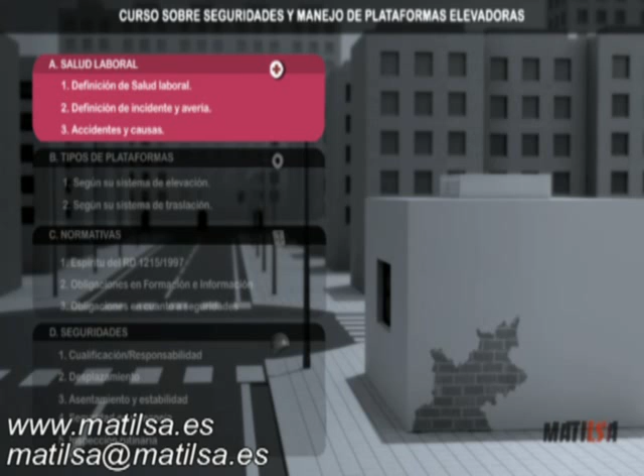Part B, Types of Platforms. We will review the different types of platforms that are on the market, separating them according to their different systems of raising and transporting, and what their most common applications are.

Part C, Regulations. It is important to know the current regulations regarding training and safety, and how these are transferred to the platforms in respect of their different safety mechanisms.

Part D, Safety. Oriented to the practical aspects in the handling of platforms and the basic safety procedures while working with this type of machine.

We hope that this course makes a contribution to decreasing as much as possible accidents due to both lack of knowledge of the working tool itself and good safety practices.

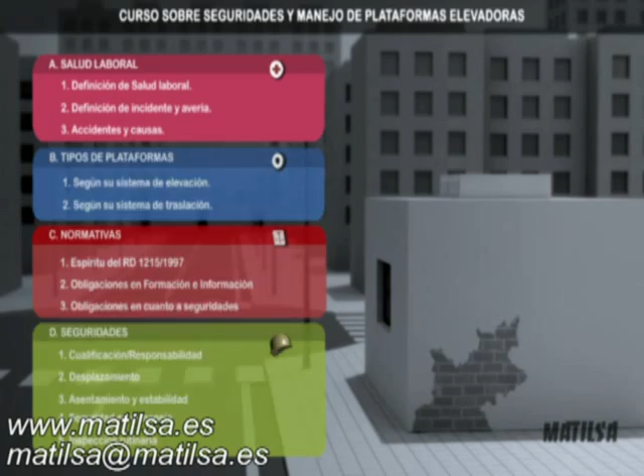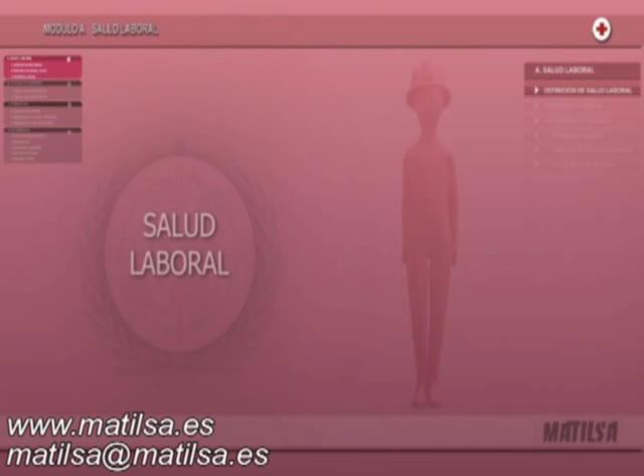Concepts of working health. According to the World Health Organization, working health is the field that ensures that the worker who works for other people maintains the correct levels of physical, mental and social health in his or her workplace.

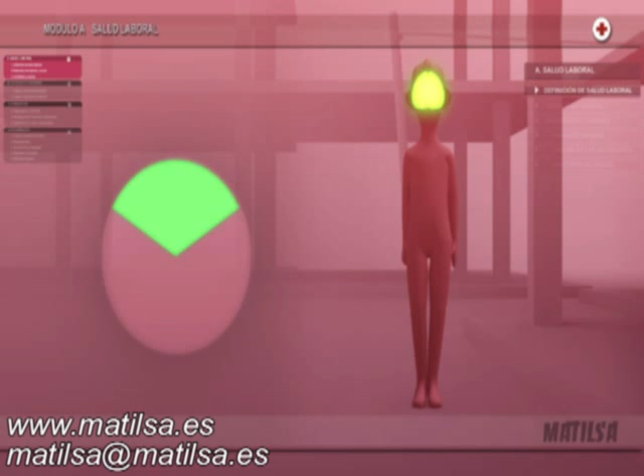Physical or organic health that a person has as a result of the correct function of his or her cells, organs and biological systems. Mental health, which assumes an intellectual and emotional balance. The social health or welfare of the person in his or her social relations.

An incident is defined as every single abnormal event, not desired or wished for, that comes about in a sudden and unexpected manner, breaking the normal work activity. When we talk about incident, this always refers to people, although incidents do not cause harm to health.

Breakdown is defined as every single incident that affects the good function of a machine or work tool. When we talk about breakdowns, we are always referring to machines.

Accident is defined as bodily injury in which the worker suffers as a result of the work that he or she carries out for somebody else.

If the accident is an event with physical damage, the incident, on the contrary, is an event that has not caused harm to the person, but could have done so if the conditions had been different.

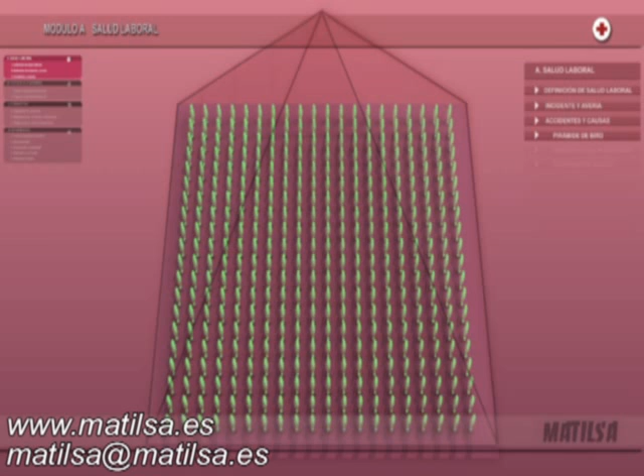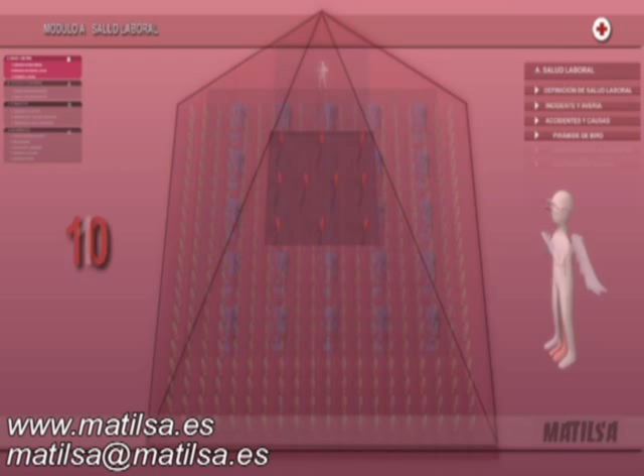Bird, who was an expert statistician, discovered that for every 600 occasions in which incidents without injury happen and are not reported to the company, 30 incidents or breakdowns are produced with material damages, 10 with accidents that cause minor injuries, and 1 accident that causes serious injury.

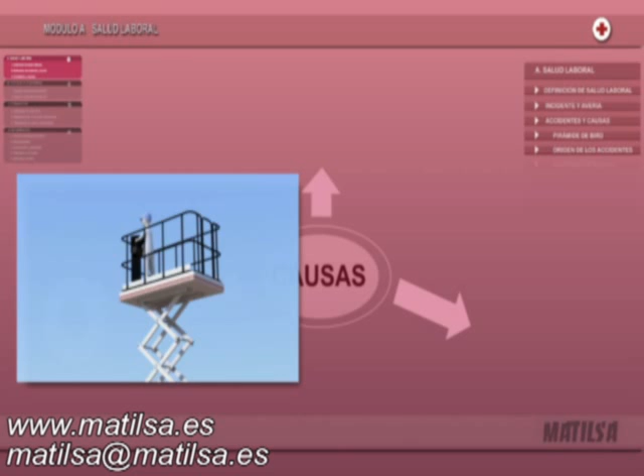The origin of accidents. Accidents can be classified according to their causes thus. Technical causes: these are failures of machines and equipment together with events caused by operations which have been badly designed from the aspect of safety, etc. These causes are relatively easy to know and to control. The location of the failure is detected and a technical measure is applied to correct or reduce it.

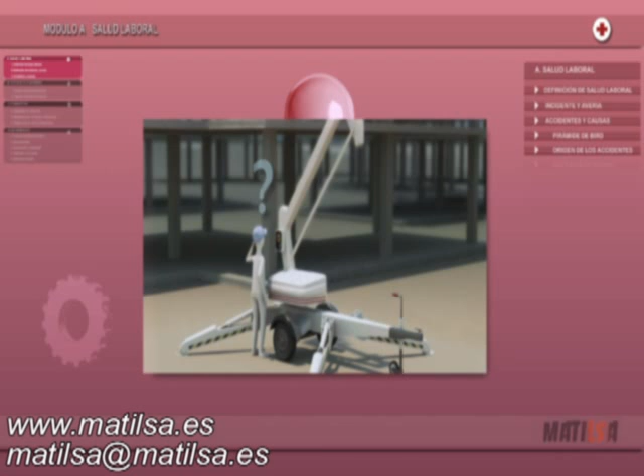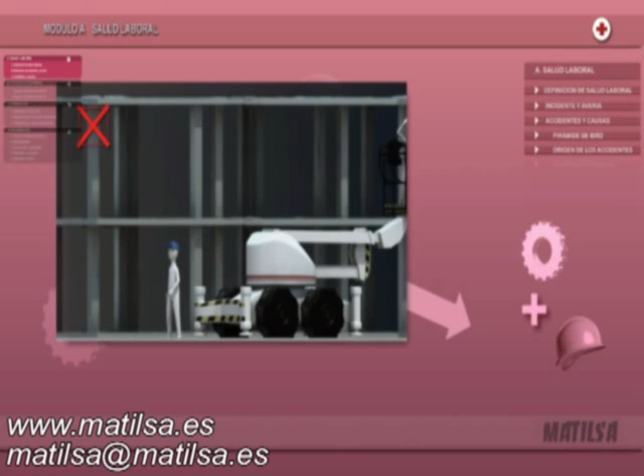Human causes: these are acts in which the workers, due to their lack of information, training, attention or interest, produce directly damaging effects. Human and technical causes are simply a combination of the two aforementioned causes, that is to say, the existence of a technical failure plus an act of lack of attention, or the technical failure linked to the lack of knowledge of the worker.

Risk factors. Some risk factors also exist that can cause a greater number of accidents. These factors can be classified according to their origin. Material factors, such as tools in bad condition, breakdowns, etc.

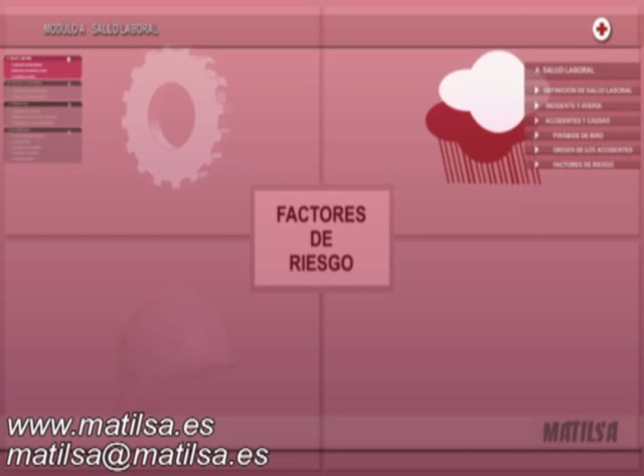Environmental factors, caused by the conditions of the working surroundings, weather conditions, ground conditions, etc. Human factors, caused by human error due to lack of information, bad working health, etc.

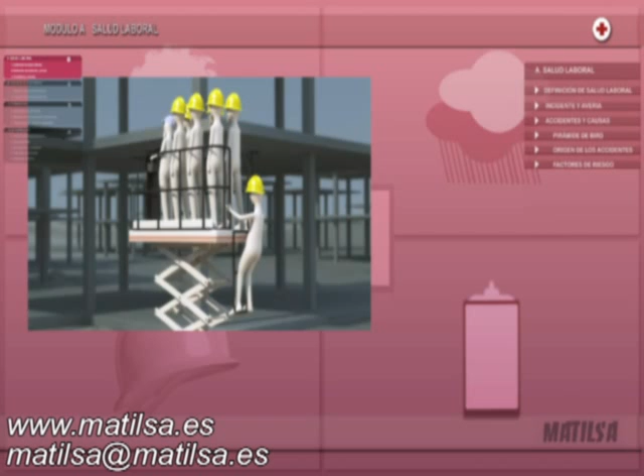Organizational factors, caused by organizational mistakes, that is to say, by work being badly organized, personnel badly located, plans badly made, or bad assignment of delivery times.

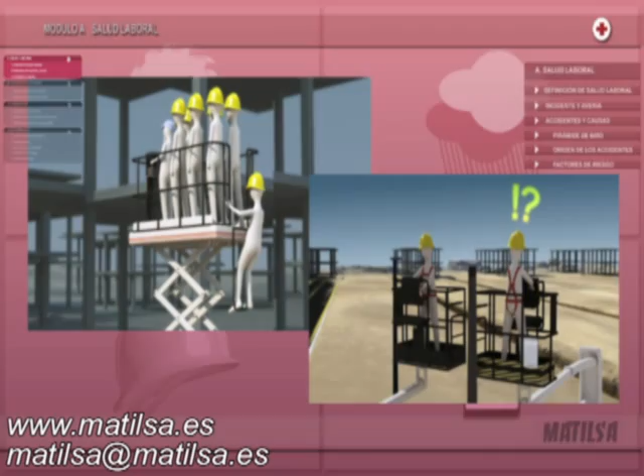Types of access platforms. The access platforms can be classified by their system of elevating: articulated type, telescopic type, and scissors type.

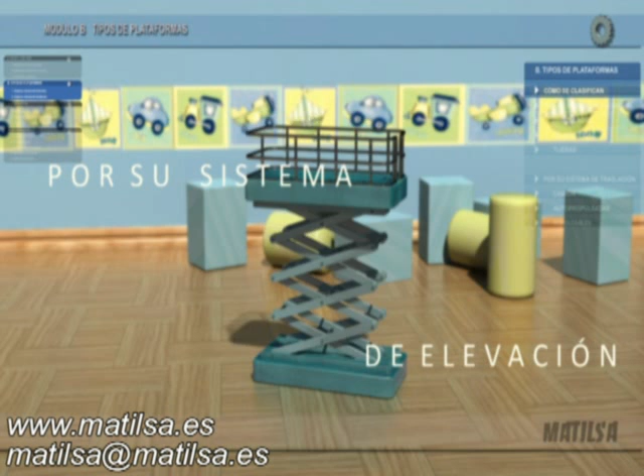They can also be classified by their system of transportation: truck mounted, self-propelled, or trailer mounted.

We can combine the different systems of elevating and transportation to satisfy all working needs. It is also frequent in the articulated and telescopic types to combine both systems in order to obtain greater versatility, as we will see later.

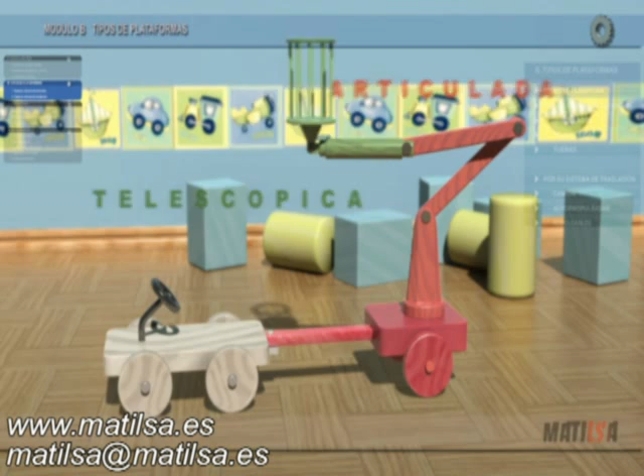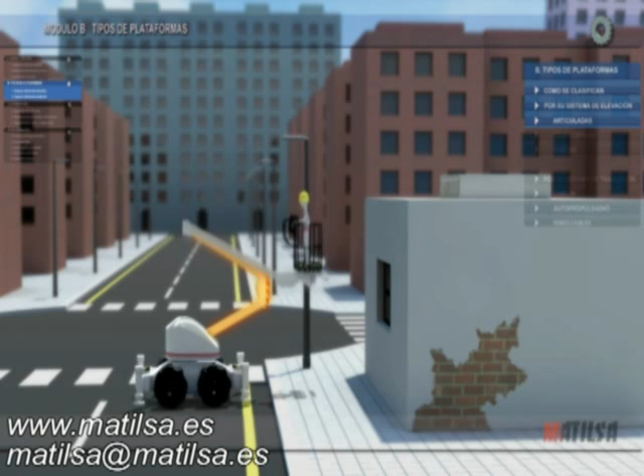Features of the different elevating systems. Articulated platforms. Articulated comes from the concept of articulation. An articulation is composed of two arms. In addition, there are a large number of machines that have an arm within another one.

These are known as telescopic systems. These are used where there is a higher lateral transportation to be carried out. These machines are called telescopic articulated.

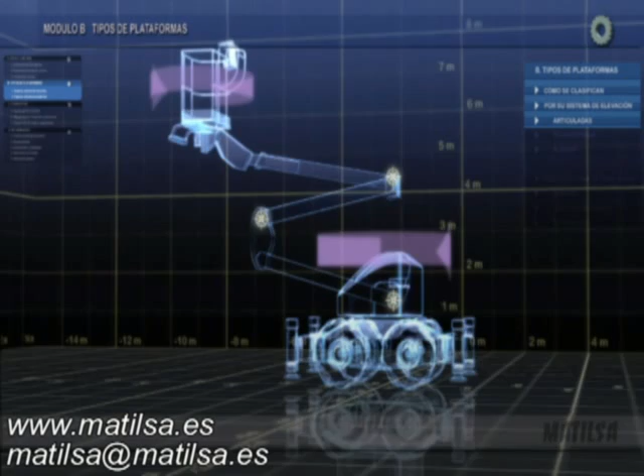Working features: this kind of elevating allows for sideways transportation and is thus able to avoid obstacles that can be underneath the working area. In these, the tower group can turn left or right, fully or partially, 360 degrees.

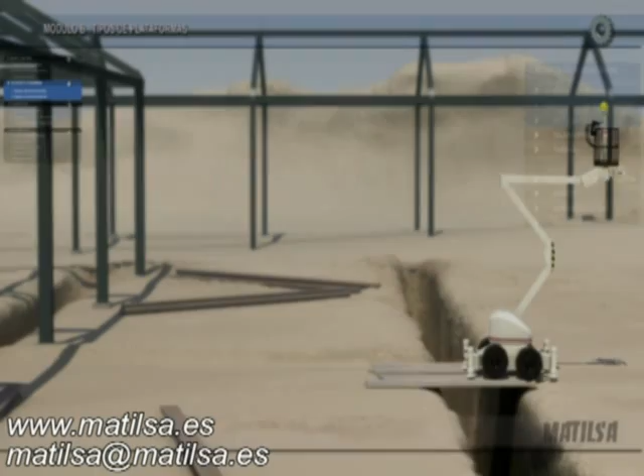Main tasks that are performed. This system of elevating is used by the assemblers of structures, since especially at the start of the work there may be many trenches and obstacles.

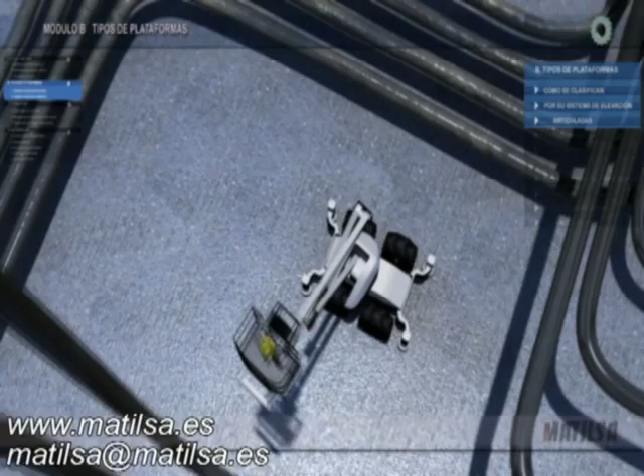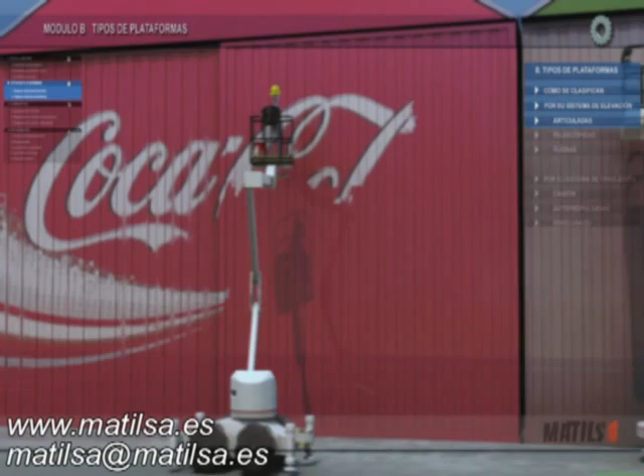Maintenance on unstable ground. Maintenance of gas or petrol stations, public and private lighting, pruning of plants in parks and gardens, concrete works, projections, painting, cleaning, since generally speaking the machine avoids damage from falling objects or materials, unlike what happens with the scissor-type ones. Refurbishment of housing and industrial sites.

To sum up, all those areas where access to the work site would not be possible due to obstacles which may be situated just below the point at which access is desired.

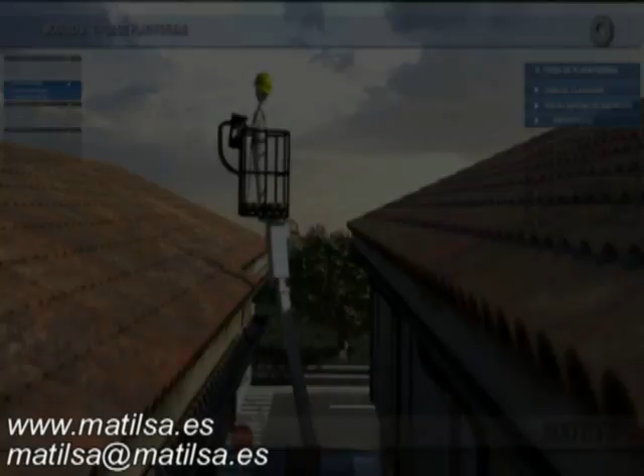Telescopic platforms. The elevating system of these platforms consists of a number of arms that are driven hydraulically by pistons, some housed within others. These platforms also normally carry a small arm called a jib, which makes them more versatile in the working area.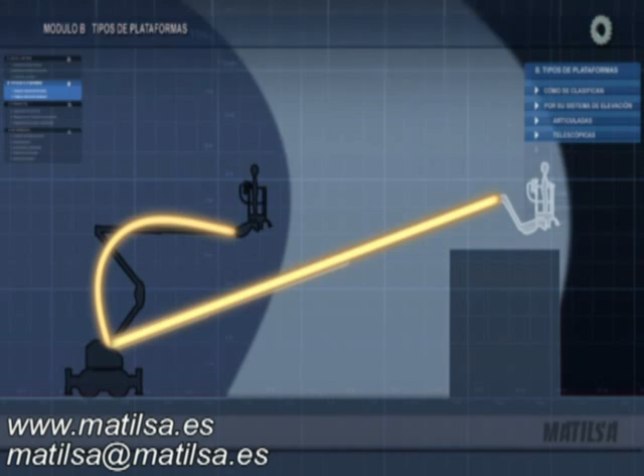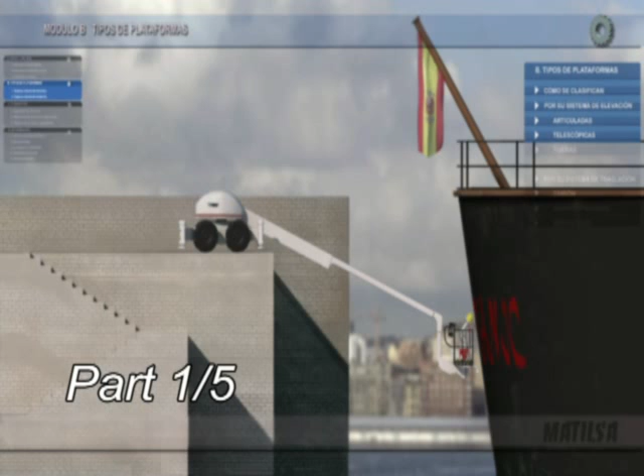Another advantage of this type of platform is that it allows the basket to be placed a few meters below the base of the machine. A clear example of this is the access to the hull of a boat anchored in a port. Here, there are areas that are underneath the level of the base of the platform. As is the case with the articulated ones, the tower unit may twist left or right fully.